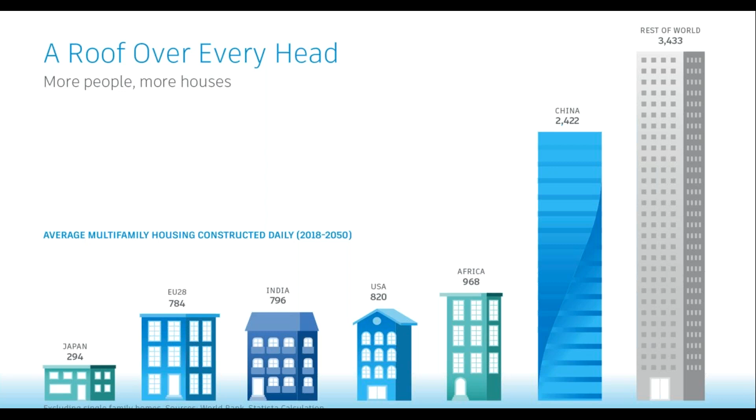We're going to need more housing, as well as commercial construction. This is based on some research from Statista. This shows some of the multifamily housing that will need to be constructed daily to meet this need over the next couple decades.

However, all of this building comes at a cost. How do we use energy and materials more responsibly? How do we design our buildings better to limit damage to the earth? How do we think about both the operational and the embodied carbon of projects, how much water and how much energy they consume?

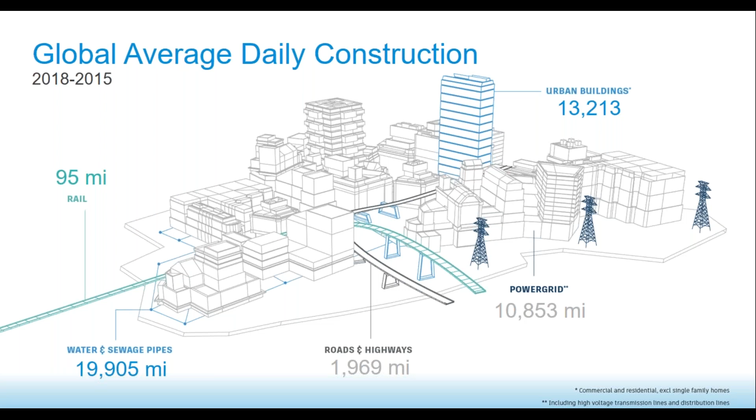Beyond the structures, the buildings, and the materials that will go into them, there will also be a tremendous amount of infrastructure required to connect everything. It's very essential that we continue not to do things business as usual. We're going to be connecting things with grids, with rail, with roads, and all of this construction is going to require a big carbon commitment.

When we make building materials and products, they cause greenhouse gas emissions. Activities such as mining, driving trucks, running factories, and combining chemicals result in emissions to the air, earth, and water. Embodied carbon is the sum impact of all the greenhouse gas emissions attributed to the materials throughout their life cycle, from extraction from the ground through the manufacturing process into the construction process and the maintenance and end-of-life disposal.

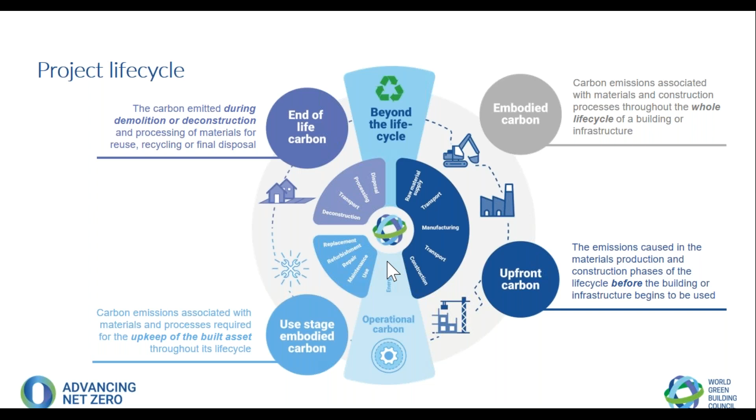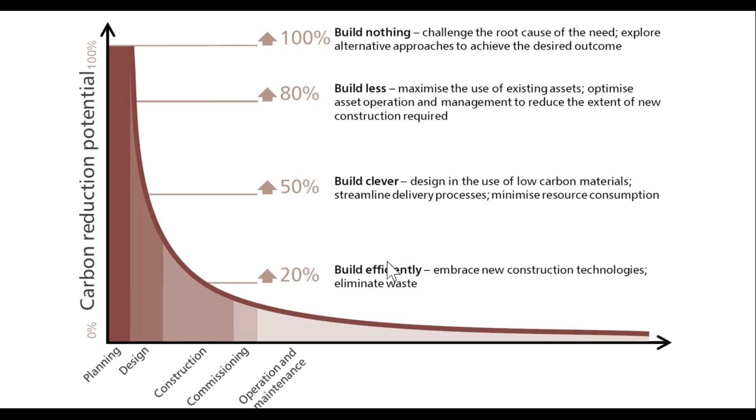However, the critical time is in the next decade. Within the next 10 years, the embodied carbon will be about 74% of total carbon. That is why this is a critical need to address now. This is why this topic has gotten so much attention and why we are spending the time educating you today on it.

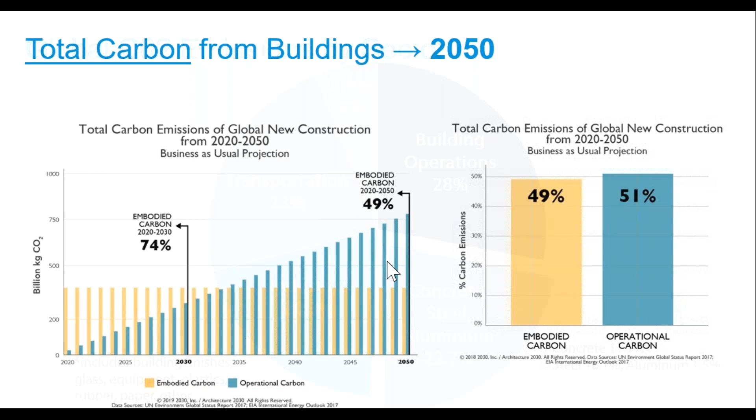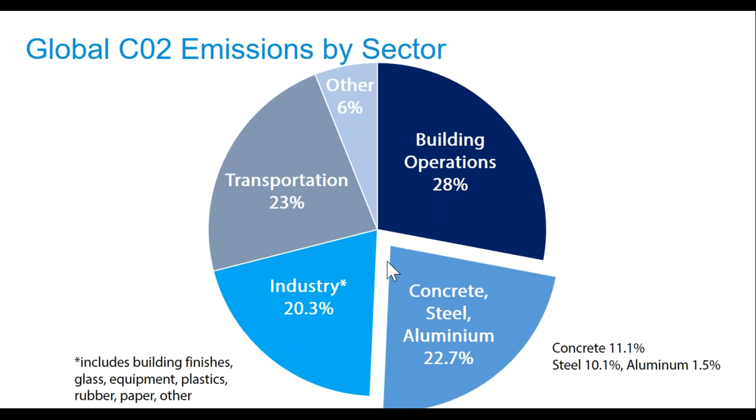So I'm going to wrap up to talk about two of the materials that we just looked at. We looked at concrete and steel. And the important thing to know is that even if we still use these materials, there's ways to use them more intelligently to reduce their use, and when we do have to use them, to opt for better choices.

In concrete, that may mean reducing the amount of cement through uses of admixtures, through uses of smart mix design, through supplemental cementitious materials, which means embedding waste materials into your concrete mix and essentially locking that in for the lifetime of our structures. When we think about steel, using recycled steel, and then how we make the steel. The difference between making steel in a blast furnace, a basic oxygen furnace, and an electric arc furnace, one run by coal, one run by hydro or other renewable energies, makes such a difference in that steel.

So we have to think about the materials we use. We have to think about how we can use less or fewer of them. And then ultimately, we need to make smart choices in our buildings.

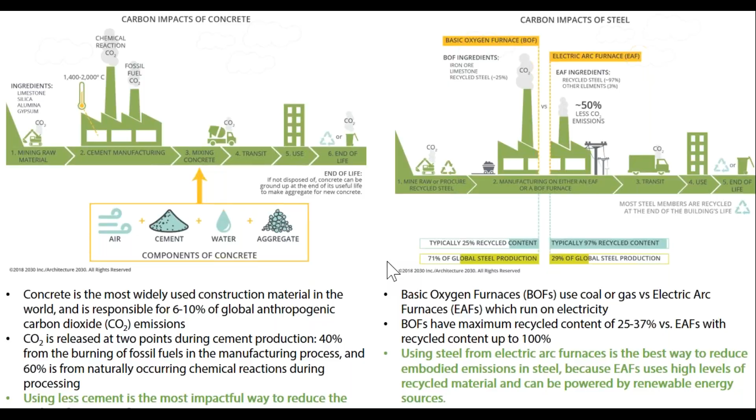So Ann and I are going to look at another aspect that often gets overlooked in this discussion of carbon, embodied carbon and operating carbon, and that's the impact on building tall versus building small. It turns out that building tall has a big impact on carbon emissions, both operating and embodied. And so we just wanted to bring that to people's attention and hopefully get more discussion about this. Next slide.

So the factors we're going to consider are the time horizon. We have 12 years to solve this problem. So big buildings have a huge impact in that time frame. We're going to look at embodied emissions and operating emissions. And then also,

Excuse me, I just dropped one of my earbuds.

There we go. We're going to look at the transportation and affordability issues and resiliency and livability issues that surround tall buildings. So next slide. New slide. So 11 years left. So this was a year ago. So we really have about 10 years to turn things around and reduce our emissions by about 65% by some estimates. Next slide. So we're going to talk about embodied carbon first.

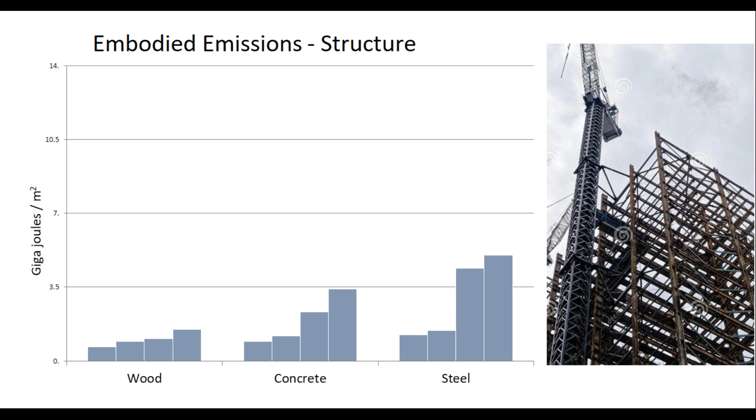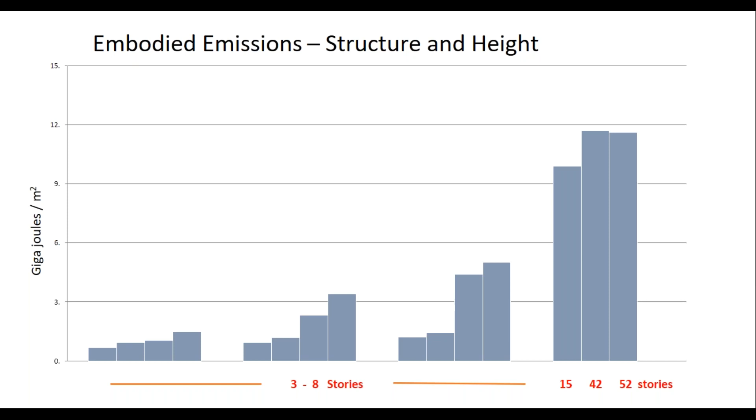This is what you might expect in basically a wood building, a concrete frame building, or a steel building. You can see that wood's significantly lower than concrete and steel, and it's sort of what people would normally think, that it's a lower carbon material, so it's going to be a lower impact. But the next slide shows that an even bigger impact is the height of the building, that when you get to 15 to 52 story buildings, the carbon jumps way up. And this is on a per square foot or per square meter basis. So it's not just that it's more carbon because the building's bigger, it's more carbon per square foot.

Next slide. The other interesting thing that happens with tall buildings is the operating carbon tends to go up. And the first time I noticed this was the CBECS high performance database in 2008, which looked at all these high performance buildings, these LEED platinum, very low energy buildings. And they found out that up to 100,000 square feet, the average EUI was 43 kBtu. And when you got above 100,000, it jumped to 69. So there's about a 60% increase in operating emissions for larger buildings.

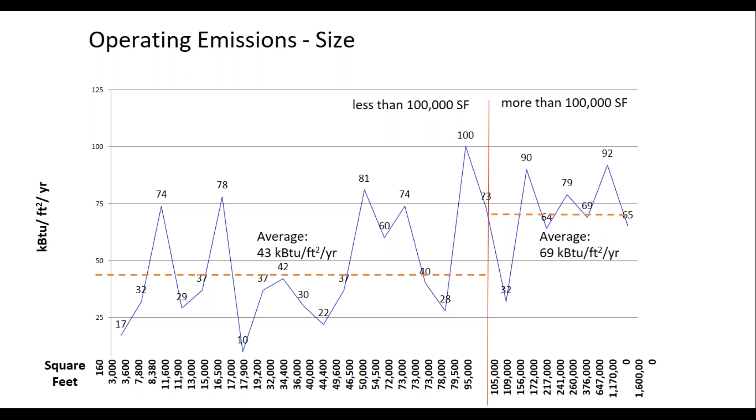Next slide, please. This is a much more recent study in Seattle that basically shows that the high-rise buildings were about 40% higher than mid-rise and 60% higher than low-rise buildings in operating energy. Next slide. And why is this?

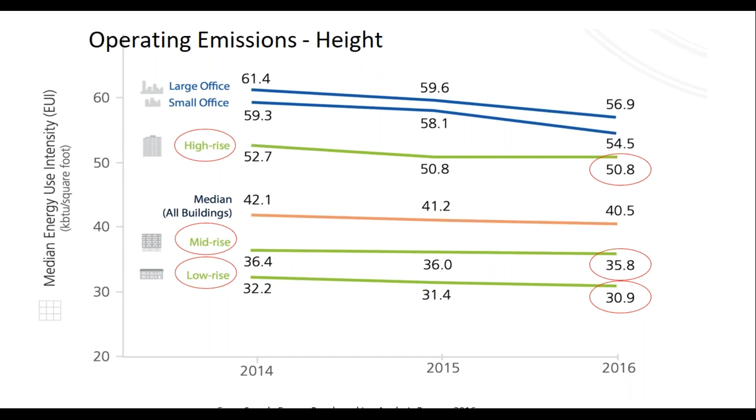Well, this was an analysis done of where the energy goes in high-rise and low-rise buildings, and except for heating, every single category is higher in high-rise buildings. Heating probably is lower because there's only 4 sides to a floor. The ceiling and floor don't have any heat loss because there's a floor above and below them, so that's one reason. Cooling goes up, partly because most high-rise buildings are all glass, or what's the point of being high-rise? So they tend to have high cooling loads. Interior equipment goes way up because there's elevators and fans and pumps to move everything around a building that's that tall. So next slide.

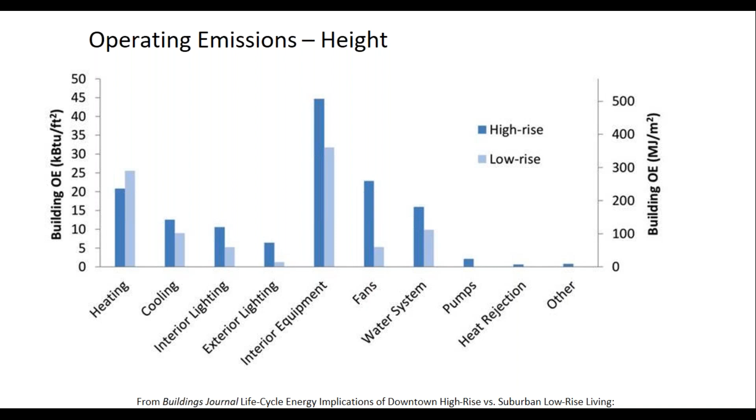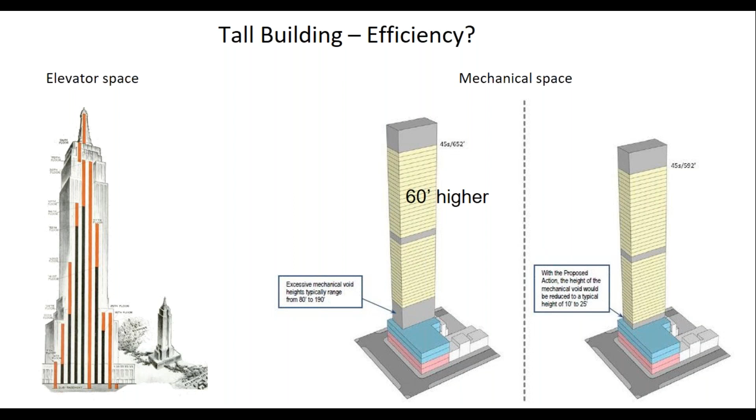The other thing that's often overlooked is that mechanical equipment space is huge in tall buildings, and a trick that developers use, which makes it even worse, is that the mechanical equipment floors aren't counted in your overall height limit. So if you want a taller building, you just make those floors taller and you get to add a lot of height, which then sells for more money. And so people are doing that. So there's actually legislation that would limit that: you can't add gratuitous height to your mechanical spaces. They've got to be just as much as you need. Next slide.

So why do people want to add height? What's the driving force behind this? Because they cost more to build, like an extra 25% to build a high-rise building versus a low-rise building. But the reason is because they sell for even more. There's a huge premium for high-rise buildings, and you're basically selling that premium and getting a lot more money for the high-rise buildings.

The other thing to mention is that who lives in the high-rise buildings typically are wealthy people, wealthy corporations. And the other interesting thing to note about wealthy people and corporations is they typically use more energy than people that aren't so wealthy. So it kind of compounds the problem.

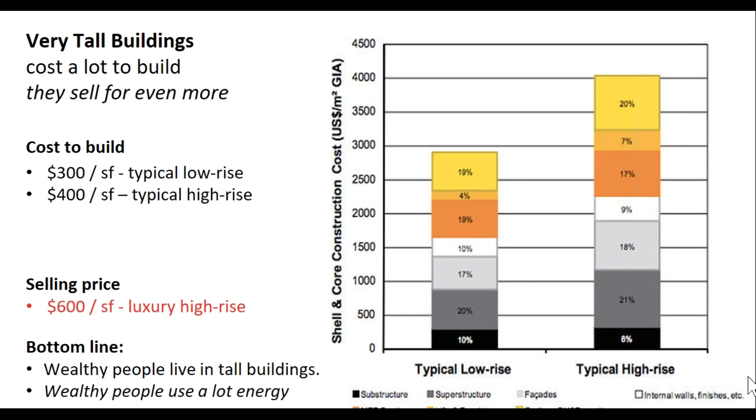Next slide. These other ones are a little bit older. This is a very recent study by Adrian Smith and Gordon Gill Architecture, in Architect Magazine's Carbon issue a few months ago. And they have an ebook out called Residensity, which is a carbon analysis of residential densities. And they looked at all these different typologies of housing, and they normalized them all for 2,000 units of housing.

So on the right, you see the single family house. That means there's 2,000 houses built. And on the left, there's one mega tall building, and it also has 2,000 units of housing in it. And then super tall, and it gives you the height and everything like this. And what you can see, which is really interesting, is that the embodied carbon per unit is the highest in the mega tall and the super tall. But the next highest ones are in the urban single family and the suburban single family. So the really tall buildings use a lot of energy, and the really spread out sprawl uses a lot of energy. And the ones in the middle, the courtyard building, actually comes in the lowest for total carbon. So you can see the total carbon on this one.

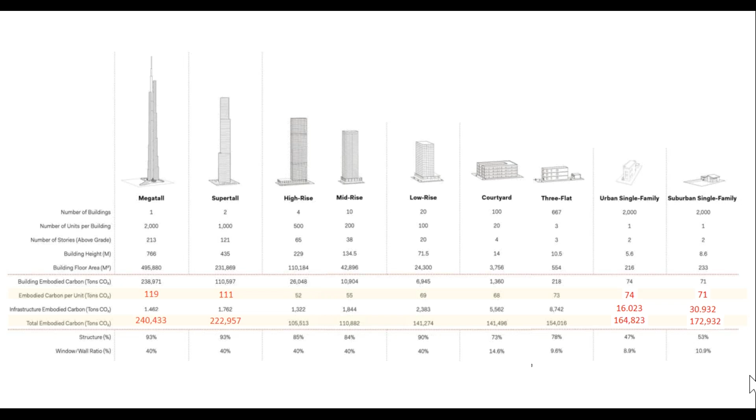Then the next slide is from the same study. The red bar at the bottom is embodied carbon, and the gray bars are operational carbon. There's one without grid optimization, which is at the top. And then if you have assumed grid optimization, like the grid's getting cleaner, it drops way down. And the little yellow bars are infrastructure carbon. And so you can see that a suburban single family with 2,000 units takes a lot of land, so there's a lot of infrastructure tied to that one. That's why that one's higher.

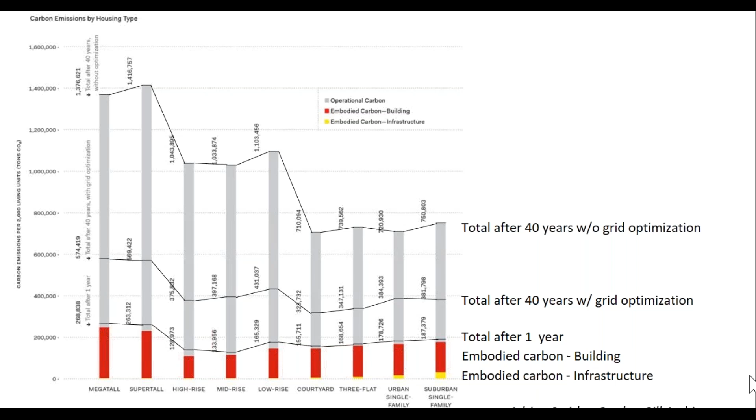So next slide. The last thing I wanted to do before I turn it over to Anne to finish up on this is just to mention this. This is going to tie into what Marcia's going to talk about. We already have a lot of buildings, and they're not very efficient. We can't really afford to replace them all. Reusing and upgrading the buildings we have would result in lower embodied emissions compared to new buildings. And if you improve their efficiency, it would result in lower operating emissions. So the point I wanted to make with this final slide, which is sort of a transition to what Marcia will be talking about, is before you build anything, big or small, consider reuse and efficiency upgrades first.

This is a screenshot of a tool that I've been working on that will calculate the total carbon impacts, embodied and operating, for these different scenarios of existing, leaving it as is, a new building, a replacement building, and a retrofit building. And you can see that the retrofit building, when you're retrofitting to even efficient building or even zero net carbon, is by far the least carbon. In fact, it goes negative because you're saving all the emissions that you would have committed.

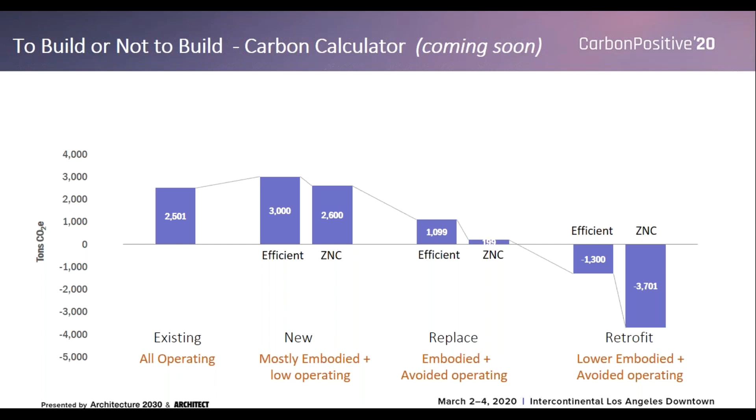So anyway, that's just a little add-on at the end as a transition. And now I'm going to turn it over to Anne to talk about a couple of other aspects of tall buildings. Great. So thank you, Larry. That was always inspiring to see that. Just going back to where we are in our list of topics here, moving on to transportation affordability with one detour along the way. Next slide, please.

So I just wanted to go back to this slide, which Larry showed you, and again point out that the courtyard prototype in the Gordon Gill and Adrian Smith study shows up as factoring in all considerations, operating carbon, embodied carbon, infrastructure, and grid optimization over the building lifespan. This is where the sweet spot is for building height.

I did a bunch of research for a book that was published 2 or 3 years ago called The New Carbon Architecture, looking at this topic more broadly, and looked at studies by Adrian Smith and Gordon Gill, as well as a number of other organizations. They all tended to point to this range of somewhere in the mid-rise, low to mid-rise range, not the high-rise, as being the sweet spot.

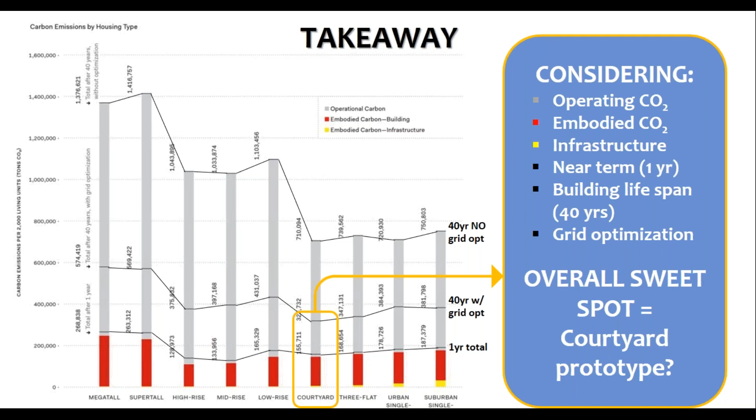Next slide, please. So moving away from the height issue per se, when I first started socializing this idea with my colleagues, I got a lot of puzzled looks, and most commonly people say, well, we need greater density in order to support mass transit. So having lived in an area with increasing density and good mass transit and increasing transportation congestion, I started to look at this, and what I realized is this premise doesn't actually stand up to scrutiny when you are thinking about a context of an already developed area where land costs and the hurdles to establishing new transportation systems are really tremendous. And so there's this problem of never catching up to the alleged demand.

And so we actually end up worsening the situation by increasing vehicle miles traveled and accompanying emissions as we increase population density. So this isn't really a solution.

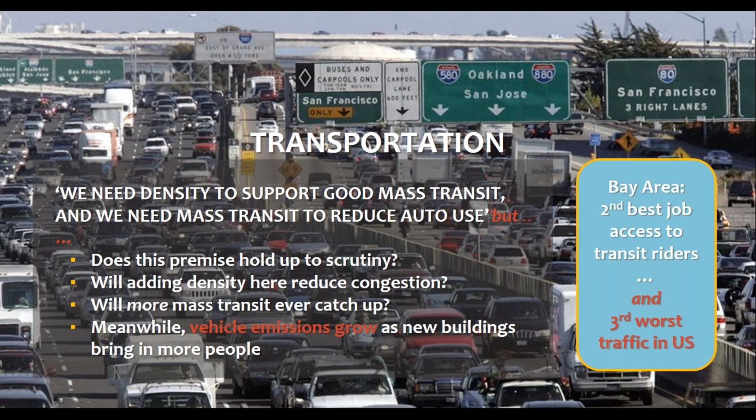Next slide, please. Meanwhile, the other argument is, well, we also need more affordable housing, and in order to provide that, it needs to be close to transportation, and it has to be, therefore, in densely populated areas. Well, there's another paradox here that, again, when I started to dig into this topic a little bit, I found that in fact, when additional housing is placed in vicinity to new transit or developing transit, then the real estate prices go higher. And as Larry already pointed out, housing in high-rise buildings is not affordable. Quite the contrary. And so this is really an empty argument that if we want to create affordable housing, we certainly don't want it to be high-rise.

It's no mistake or accident that almost all of the affordable multifamily housing developments we see also tend to be in the mid-rise range. No one knows better than affordable housing developers what contributes to affordability, and affordability in renting equates to affordability in construction. And so there's a reason these things all cluster into the mid-rise range. Next slide.

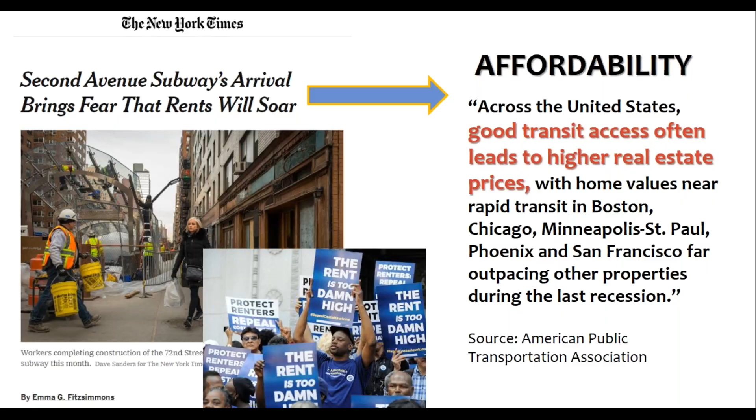So my two final points to make are not so much based on research, but on an intuitive gut response. So again, as Larry mentioned, taller buildings tend to be very dominated by glass on their facades. And this is rather problematic in the event of a power outage or other types of resiliency events because it's hard to get out of them. And if you stay in them, there are increasing comfort and even risks to health and life safety related to the loss of power.

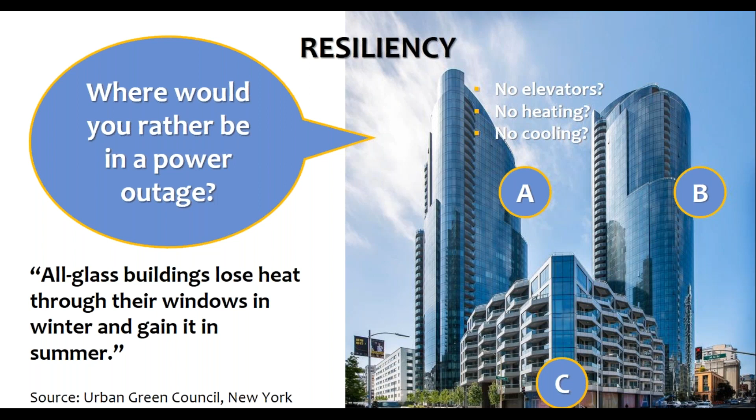Next slide, please. And this is my last one, and I think that many of us love cities. I actually love cities, but I find that the experience of being in ultra high-rise zones is really not a pleasant one because of the loss of sun on the street, increased wind tunnel effects.

You can be cold in the shade where you needn't be if the sun actually came down, and also just the sense of human scale. Taller buildings also tend to get larger and larger footprints. There's less and less visual relief at the street level to create the variety that as humans we are evolved to respond to. We respond to changes in our environment. Sameness in our environment is very deadening, and we want our cities to be alive.

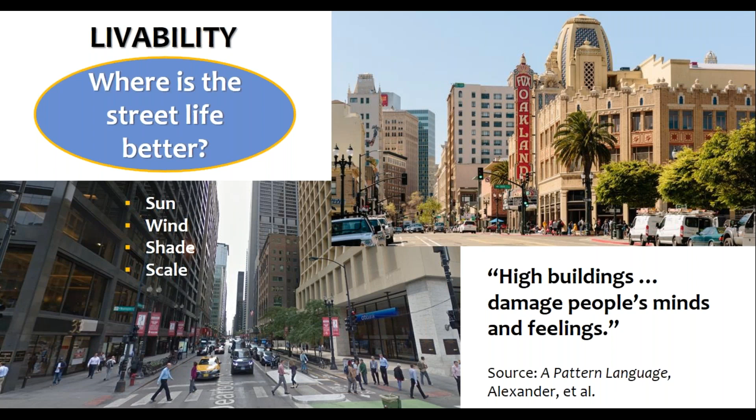And that's the extent of my comments. So my next slide is the thank you, and then we'll move on to someone else, and to just say: let's be more mindful, more vigilant, ask more questions, look at the numbers with your projects, and let's all work on policy solutions that address this issue. Thanks very much.

So I think I'm next up. This is Marsha Maytum, and I'm going to provide a case study on an adaptive reuse high performance project in San Francisco. Next slide, please.

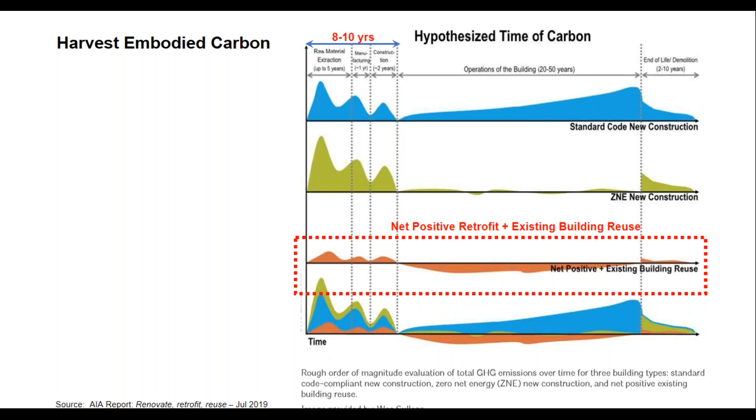So my case study is the retrofit of the historic Army Pier at Fort Mason for the San Francisco Art Institute. It's located at the edge of the San Francisco Bay, and the building was constructed in 1909 and used through four wars as an Army base, and then transferred over to a cultural art center, the Fort Mason Art Center, in the 1970s. So next slide, please.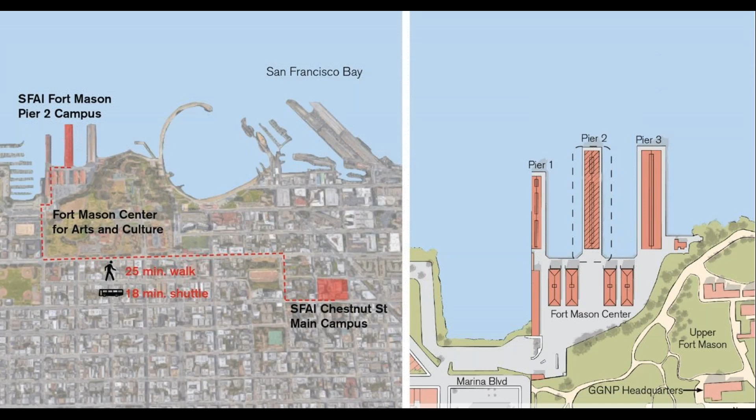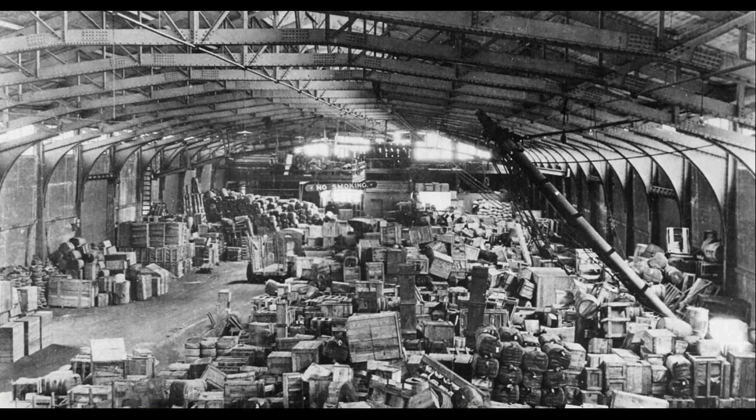Next slide, please. And its historic use—here you can see during World War II, the supplies that were housed inside of Pier 2. This building is a historic landmark because of its importance for military history. And so our charge as a historic tax credit project, working with the Art Institute, was to come up with a strategy to add program area, but still keep the integrity of this important industrial warehouse structure.

And so our strategy, next slide please, was to create a series of floating mezzanines and to carefully insert new program uses into this really beautiful, light-filled, historic industrial space. And as a tax credit project, I want to make a pitch here for the importance of the Federal Historic Tax Program—it was really an essential part of the financing for this project.

And it is a great program, but it takes a great amount of collaboration and thought, working with the State Historic Preservation Office and also the Washington, D.C. Historic Tax Credit staff with the National Park Service. But working together, we came up with a strategy that did create this incredible working space for artists for the San Francisco Art Institute.

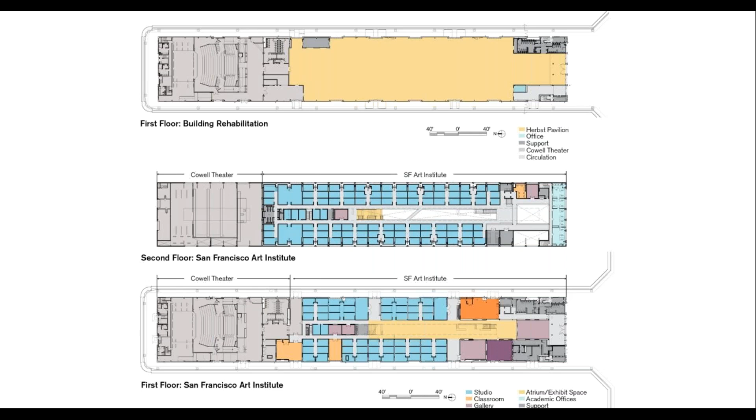There's a gray box media theater, a maker space, seminar rooms, etc. So all of these spaces were carefully inserted into this historic volume.

Another important component of this was the integration of sustainable building strategies. As you can see in this axonometric view, we were able to install a 255 kilowatt photovoltaic solar panel system on the roof, which generates 100% of the electrical needs for this building and goes back into the grid.

Another important point I'll go into more detail on is the addressing of the floor slab and the heating system by incorporating a radiant floor slab throughout this 500-foot long pier.

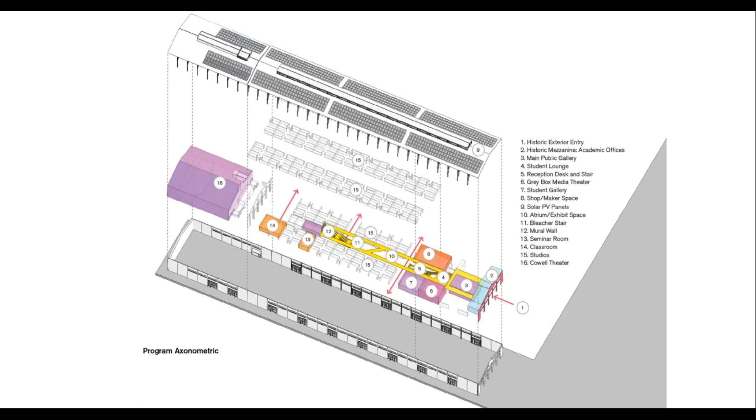Our first important move was to seismically upgrade this really lovely industrial shed to make sure that it was going to survive, it being in a high earthquake zone in San Francisco. We needed to protect the structure.

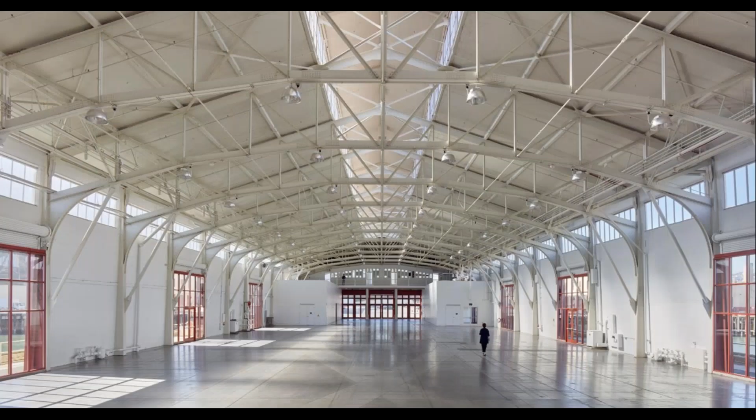This is a picture of the completed first phase when we did this structural seismic upgrade. You can see the new steel kickers, and then we installed that radiant floor slab to provide a very highly efficient and comfortable heating solution.

If you look closely, you can see the crossing of the train tracks. We kept that marker in the design of the floor so that that piece of history could be read by the public as they came into the space.

This is a section diagram that highlights some of the strategies we used. Again, you can see the 100% renewable energy with the photovoltaic system on the roof. We were able to meet the AIA 2030 commitment with an 83% reduction in energy use for a building of this type.

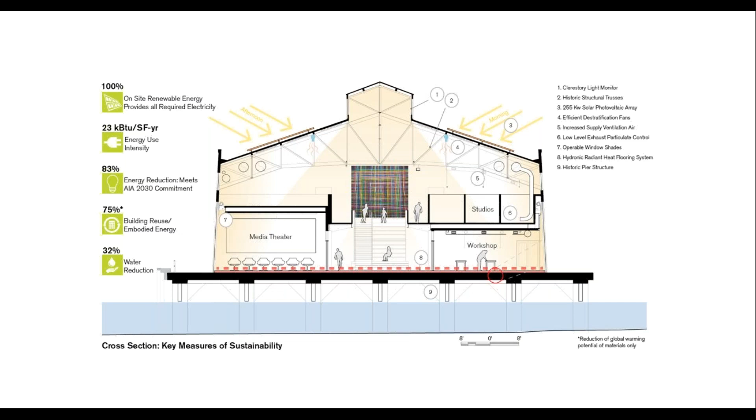I'm going to spend a little bit of time talking about the radiant floor slab because it was an interesting process with our client. If you could go to the next slide, just to highlight this building section.

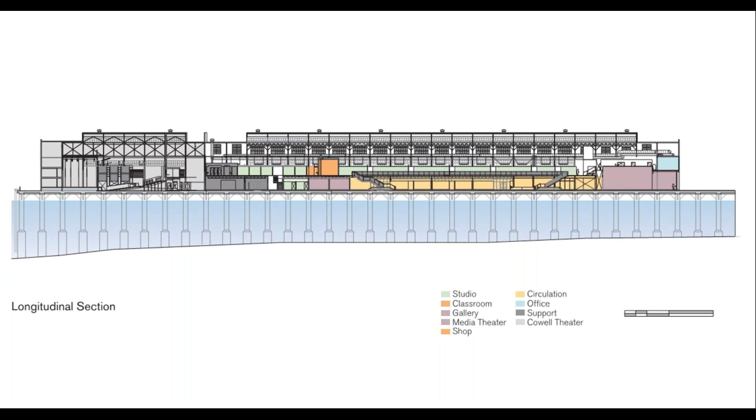It accomplished multiple challenges. It encapsulated whatever toxics were left from all the warehouse activities over the decades. We were able to put in a new topping slab to even out the floor area.

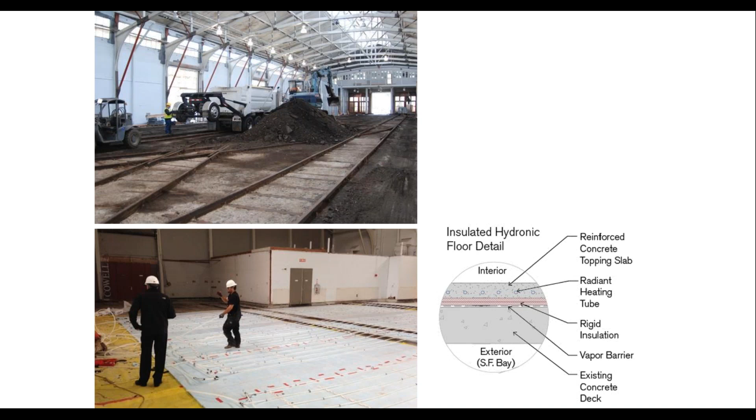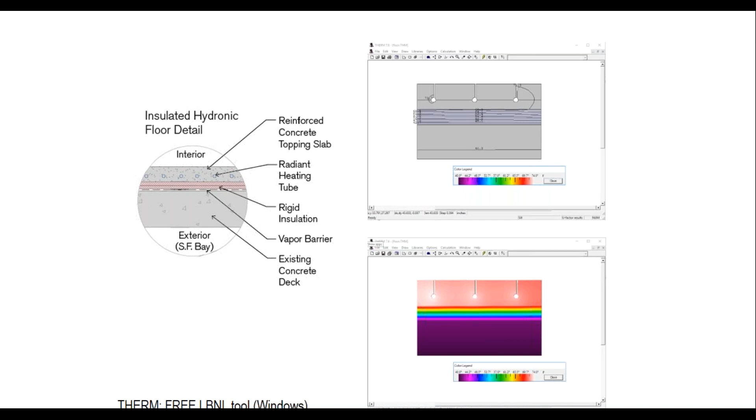We put in a vapor barrier and that important layer of rigid insulation, and then the radiant heating in the topping slab. We did an analysis using the Therm program, which is a free program, to understand what that rigid insulation did, to help us convince our client, a nonprofit educational client, of the value of expending that first capital for the long-term benefit of the comfort of the inhabitants of the building.

This was our argument: if you put in that rigid insulation, you were able to maintain 74 degrees inside, while the San Francisco Bay below would be at 40 degrees, and the under-slab would be at 40 degrees. If you did not put that rigid insulation in, on that measured day we would have a 48-degree temperature, which you would then have to spend energy for the rest of the time using the building to make it a comfortable space.

So the cost benefit analysis was very clear to our client, and we were able to put in that very important rigid insulation into this radiant topping slab.

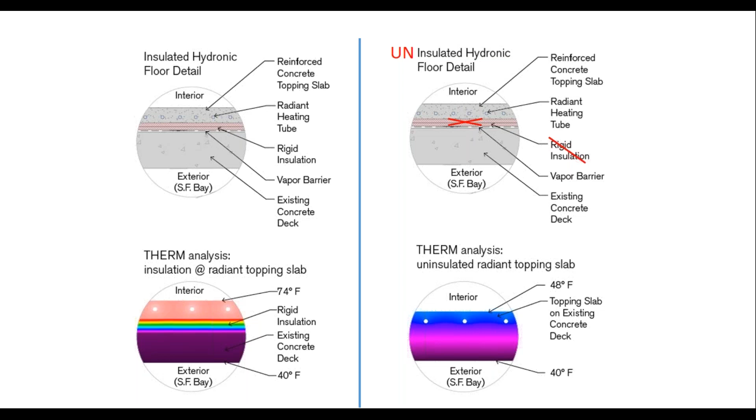One other challenge that we faced is acoustic comfort, which was really important: how to make an acoustically comfortable space for the artists and the people who use this building, in this very large, tall, hard-surfaced industrial shed. So we came up with some very low-cost, efficient strategies.

On the roof, we just did a simple grid of acoustic tile panels, which you can see in the upper part of the photograph. Once painted out, you really don't notice it. That was an approved solution with the National Park Service.

Because of the landmark status, and then you can see the floating mezzanine slabs, which were held away from the concrete perimeter walls, both for seismic separation and also just to have them read as separate structures, so that you could still see the full height of the exterior walls.

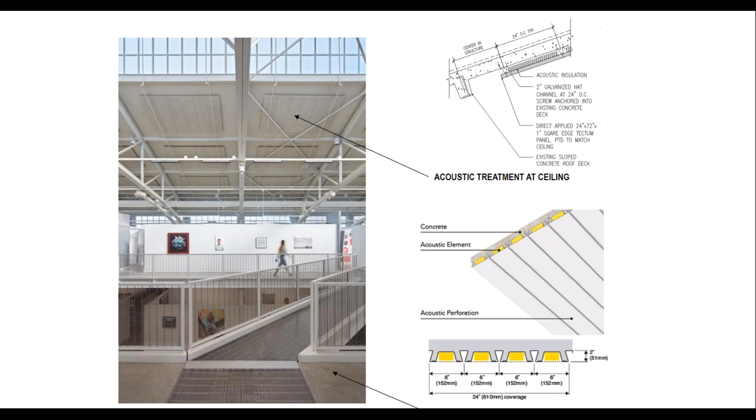At those new floating mezzanines, we used an Epicore acoustical integrated deck, both to keep the slab as thin as possible and to provide acoustic treatment. You can see the underside of that floating mezzanine slab has acoustical treatment and perforations integrated into the structural deck.

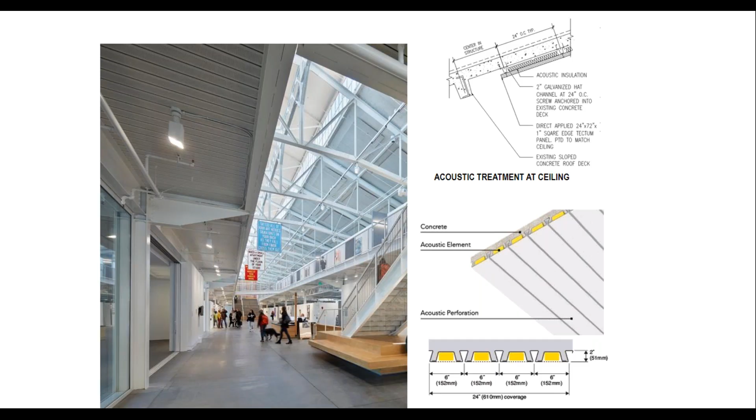A little bit about the energy performance: this 255 kilowatt photovoltaic array on both sides of the pier was a highly controversial item.

We worked closely with the National Park Service, our California State Historic Preservation Office, and the Washington, D.C. National Park Service office, which rejected this initially in our tax credit application, saying it was not appropriate for a landmark building. The State Historic Preservation Office and our office made a plea and got that ruling overturned. It's now a very visible, great example, viewed by everybody going across the Golden Gate, of the power of renewable energy.

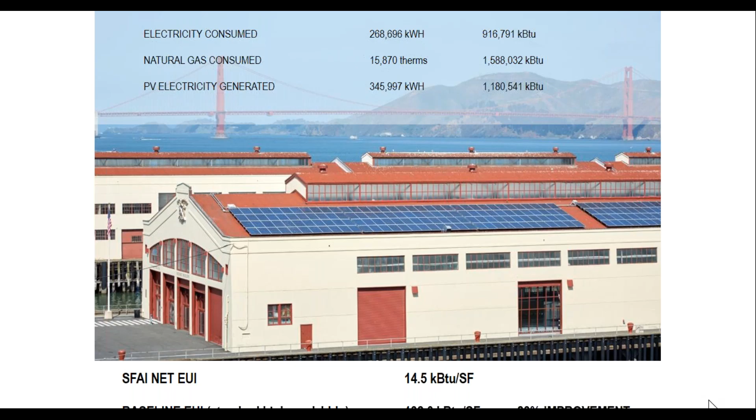I just want to end on a few slides of how this space has been brought to life for a new use for the next 100 years.

It's had a very successful life for the last 2 years, with wonderful events and gallery exhibits, and students doing fantastic work.

It has been a really exciting time over the last couple of years, but unfortunately, some of you may have read in the New York Times and other media outlets that the San Francisco Art Institute, founded in 1871, one of the oldest fine art institutes in America, is ceasing operation, partially because of the current pandemic. But we're hoping it will find a new partnership and reopen after this current global crisis is done.

I think the important story here is that through adaptive reuse and high performance retrofits, we can take not only these important embodied carbon resources, but also these important embodied cultural resources, preserve them, give them a new life, and have them integrated into our community for the next 100 years.

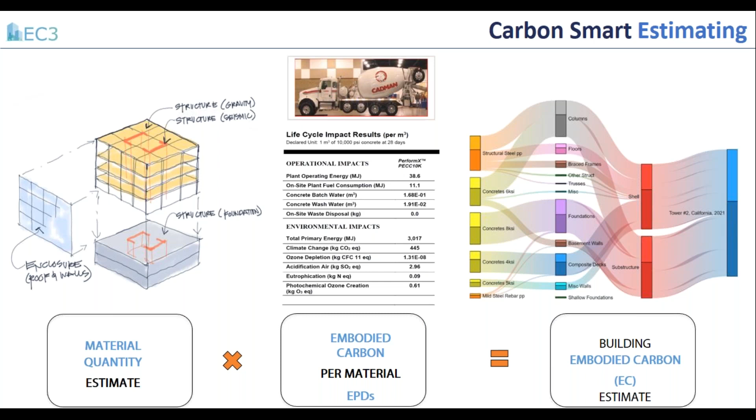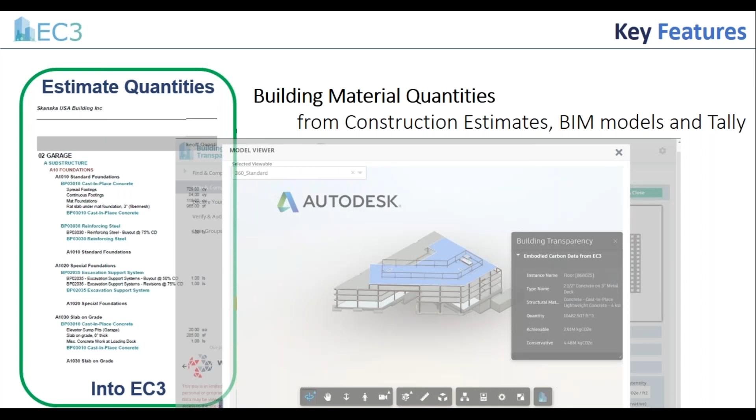So let's talk about where we get that material quantity. We can take that material quantity from the BIM model, if you're doing building information modeling, it can come from construction. It can come from a BIM model that just imports your structure, or it can come from something like Tally, where you're doing life cycle analysis.

So here you see what can come from the tool: carbon smart estimating. You look at the materials and where they're produced. It gives you a range of what's achievable, what's conservative, what's best in class. You can start to see the variance in the emissions based on your material, the conservative estimate of what you can save, what's achievable in the 20th percentile, all the way down to zero embodied carbon in your materials.

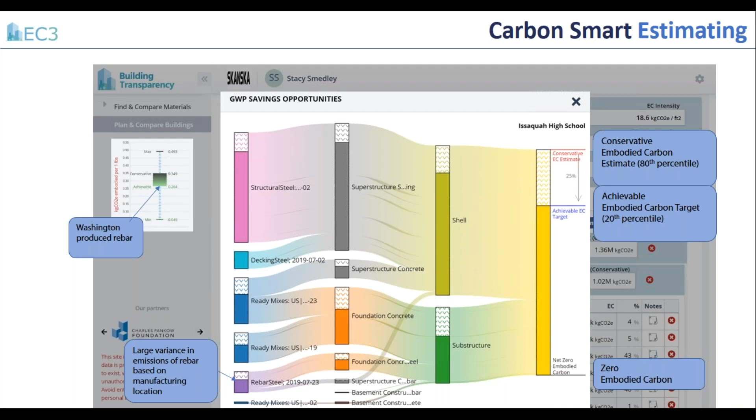So what this allows is it lets you quickly understand the range of a material, and it lets you find and compare different environmental product declarations of your materials into your building's project profile. So you can start to sort them and look at them based on their global warming potential.

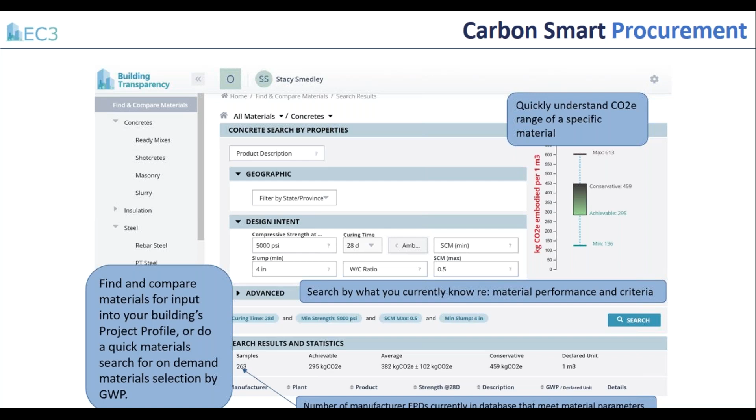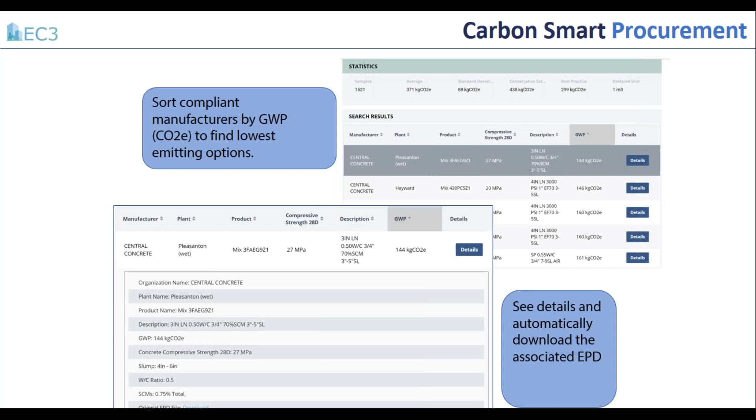So you can sort by the global warming potential to find the lowest, and then you can see the details and automatically download the environmental product declaration that's there. That's really important because the documentation of a lot of this is essential, and then going to the right manufacturer to find out what you need.

What's really fascinating is how it's been driving the industry since it's launched. Here you see three different producers, kind of the average of everyone, and then your competition. So now you can walk up to a concrete producer and ask them, hey, I see that you don't produce EPDs, we'd really like to work with you, can we do this? We're starting to see this both across steel and concrete industries, but also elsewhere.

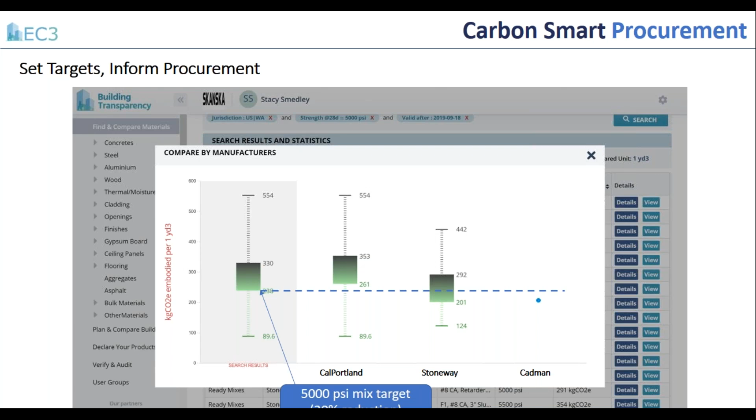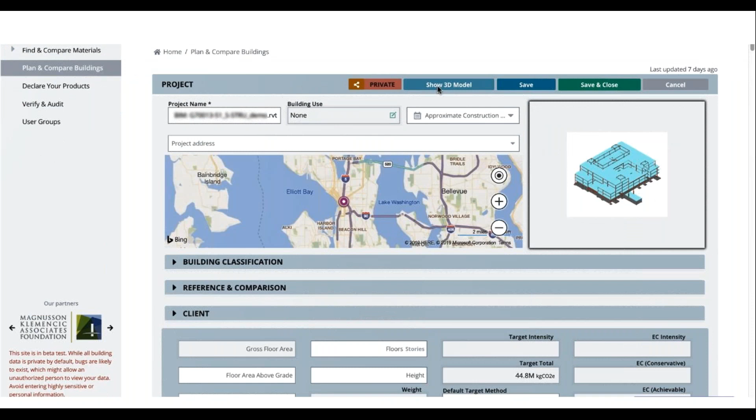So we'll see if this plays. This is a quick video showing the import of a BIM model into this tool. What it does is let you leverage the embodied carbon calculator, but also then use the 3D model as a viewer of where you have potential based on your design intent, based on the materials you selected, to visualize that and see where you have potential to do better, where things are red, where you've really hit it with a great choice or selection in green, and otherwise.

This gives us the ability to specify and procure carbon smart materials, and that's probably the most important thing of this tool. I'm going to show you a little bit of the uptake in use in the next slide.

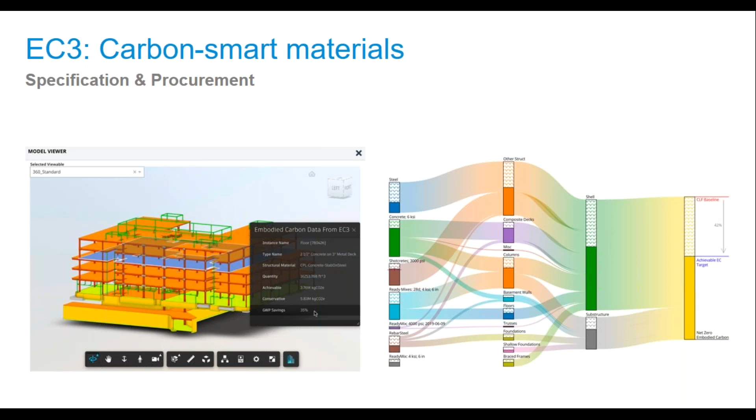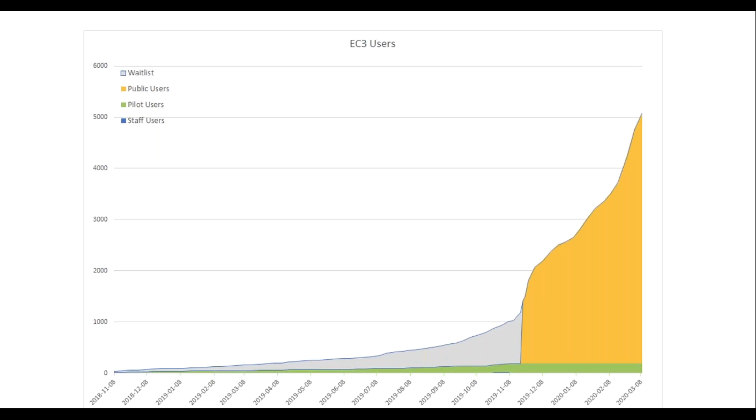It was started by Skanska USA when they were working on the Microsoft Campus project. With funding and support from the Charles Pankow Foundation and Interface, Autodesk was able to come on as a technology partner to help tie this all together. It's been funded from the industry, and no one owns it. That said, it was made to solve these problems we've addressed in this webinar quickly and efficiently.

You see what happens when an industry comes together and people work towards a common goal. So that's just a high level overview. Please go to buildingtransparency.org if you want to use the tool or learn more about it. And that concludes it. We're happy to take questions and answers. Thank you very much for your time and for sticking through this with all of us.